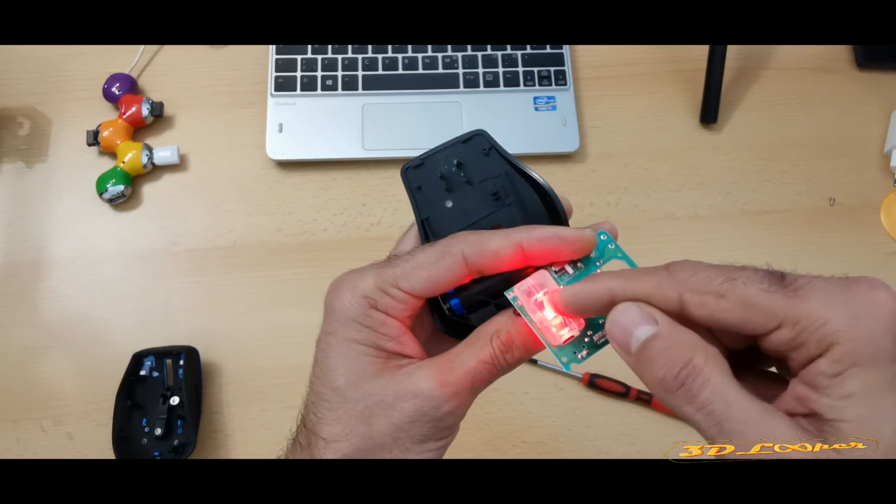And under the optical sensor we have this plastic part which deflects the light coming from the LED to the surface under the mouse, and the optical sensor captures a sequence of images and sends it to the DSP, and the DSP processes these images and then knows whether the mouse is going left, right, up or down. So this is how an optical mouse works.

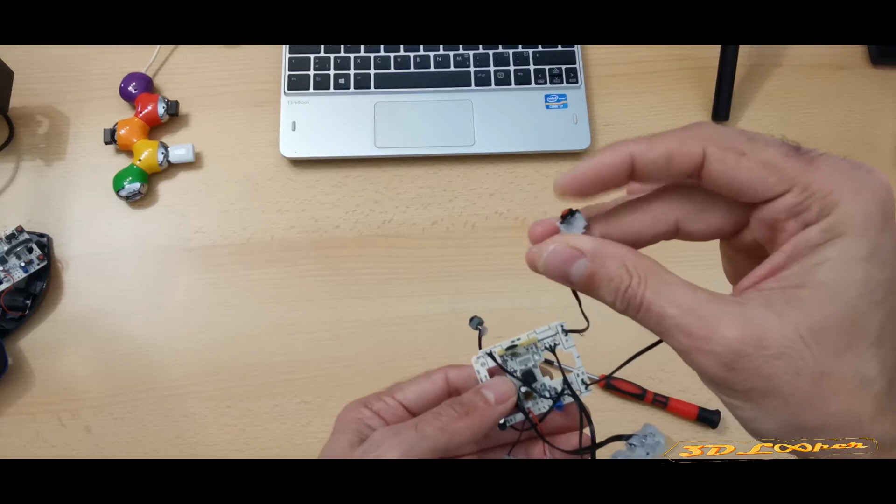Now let me show you the modified circuit. It's a very simple idea. I extended each part by attaching small cables to them. The purpose of this design is that I will later be able to install this circuit in any shape of casing. So we have the left button, the right button, the scroll wheel part, and the optical sensor glued together

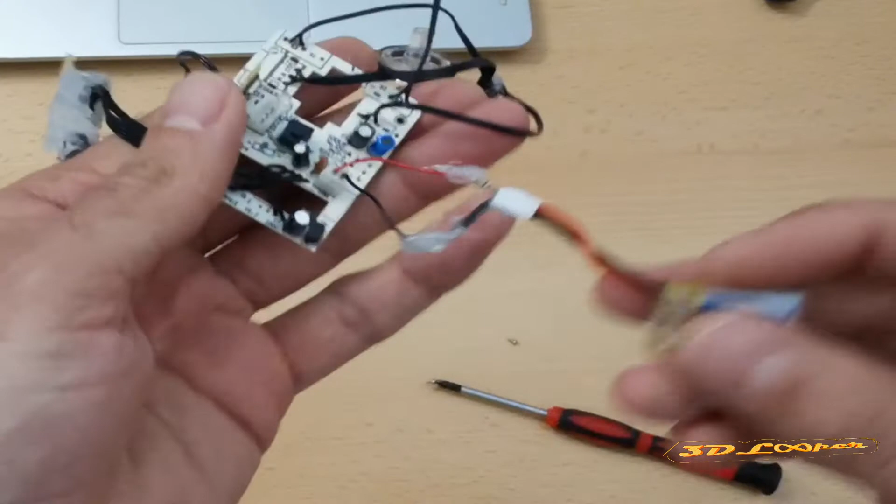with the LED. Another interesting modification I did: I attached a small rechargeable battery instead of a AA battery, which will save some space. So yeah, this is how the modified circuit looks. Now let's see how to 3D model the casing.

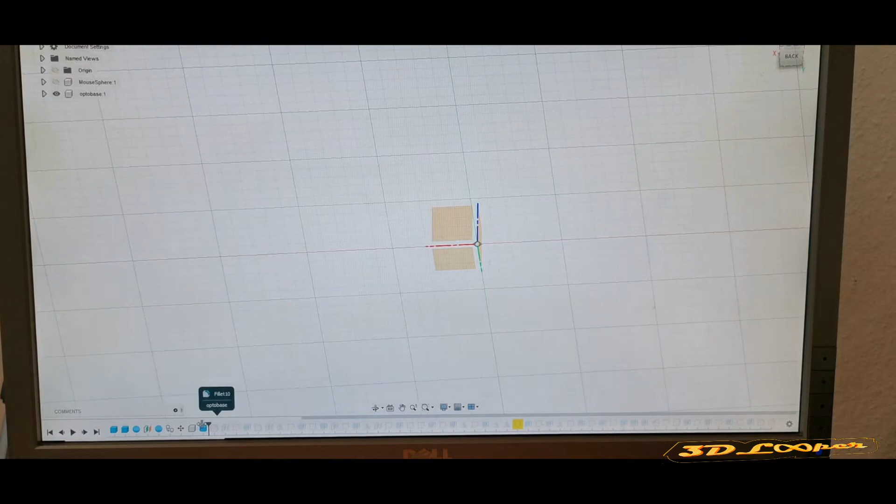I'm using Fusion 360 to create the casing for the new optical mouse. I first draw a cylinder of 66 millimeter diameter and 40 millimeter height, and I smoothen the edges, and then I created the left and right buttons in this way. This design will help later, I will explain.

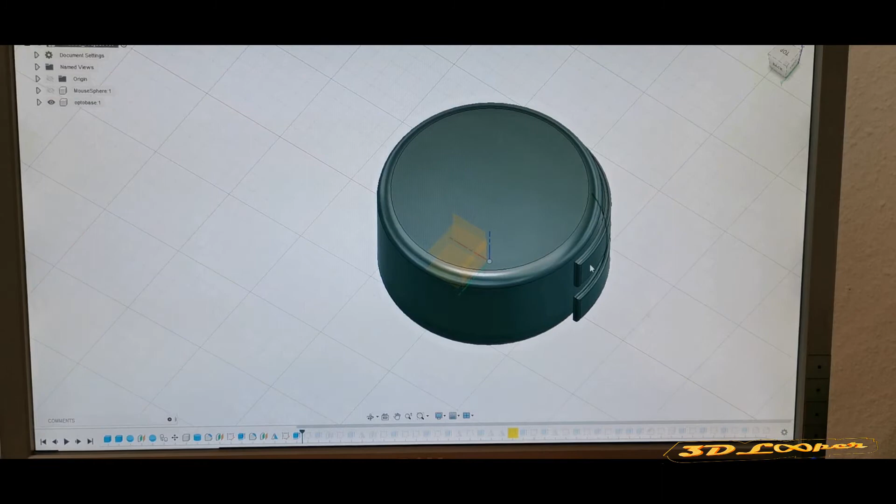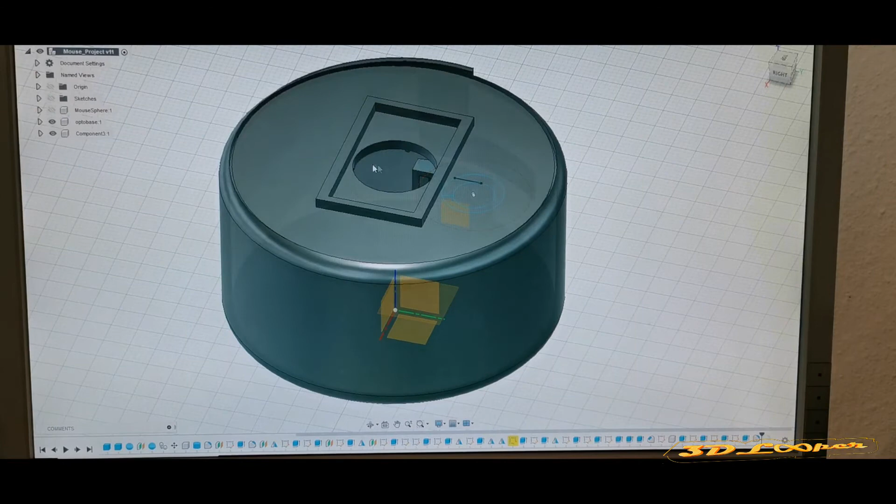And then I created some places for the left and right buttons, a place for the scroll wheel and the place for installing the scroll wheel base. And the top part, and some place to install the optical sensor and the LED. So this is a very simple design.

I want to test my modified circuit with this casing, and because it has extended cables, I can later install it in another model and test it with a more aesthetic design.

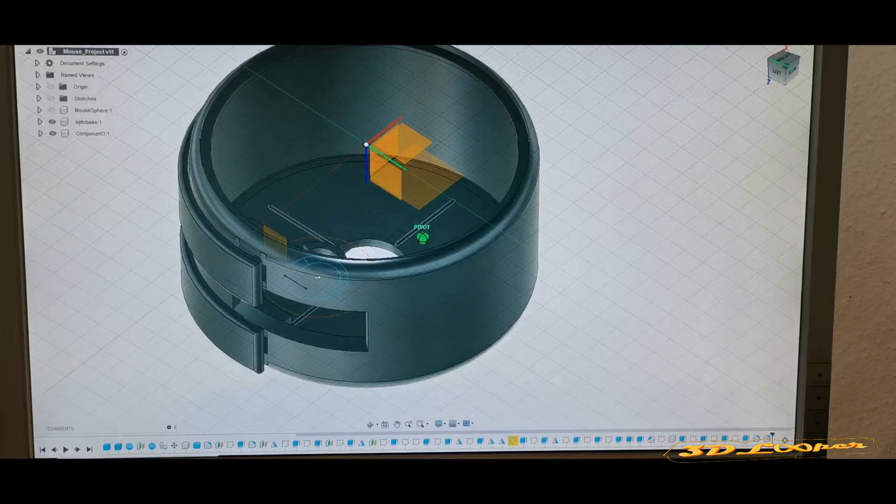scroll wheel. And now I can sit back and relax and control my PC using my thumb, and I don't need any mouse pad or a flat surface. Another advantage of this design is I can still use this mouse as a conventional optical mouse with a flat surface and with a mouse pad.